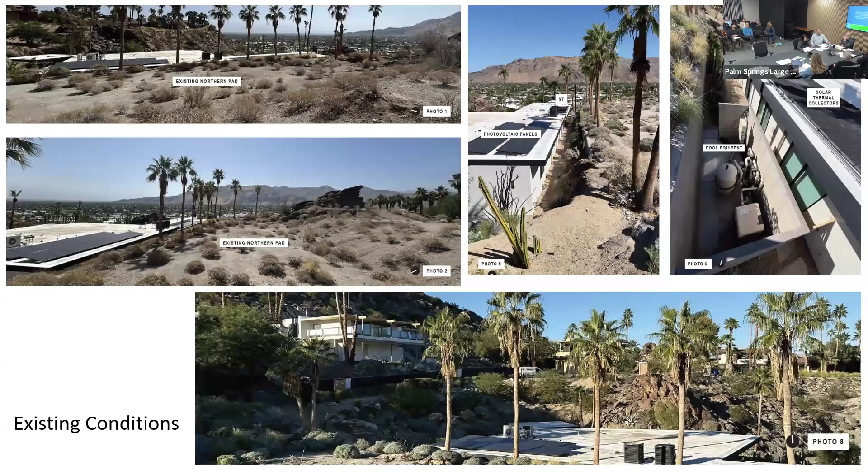As far as existing conditions go, the photos on the top left show the project site in relation to the house on the north and how it sits. I believe it's 8 feet lower.

As far as the initially proposed residence, that house sits at 19 feet 4 inches with the approval of an AMM application, and the stepped house sits at 18 feet at the highest point.

Overall, the sun studies show that there is roughly an equivalent impact on the neighboring house during the winter solstice time, whether the house is stepped or built as proposed. So basically what the sun studies have shown is that there isn't a significant difference either way.

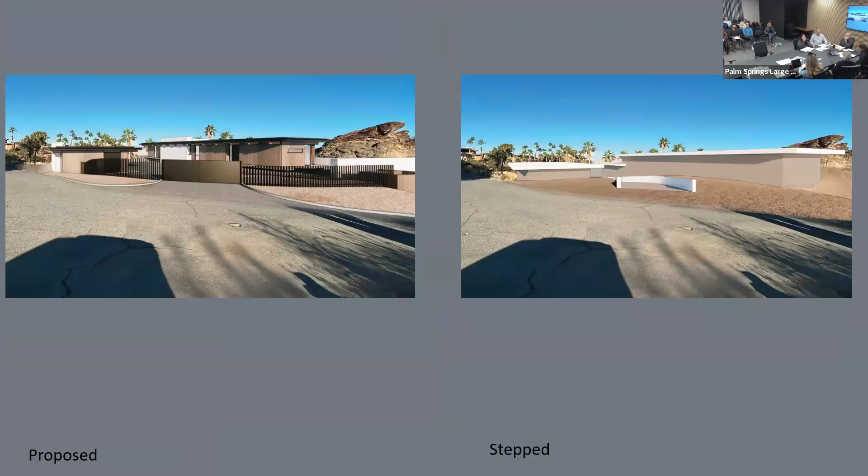Thank you. And just for reference, this is the street view with the proposed single-family residence, and this is the residence as stepped, so a continuation of the massing diagram.

The recommendation is that, based on the findings in the staff report, staff recommends the Architecture Review Committee approve the application subject to the attached conditions of approval. That concludes my report, and the applicant is available to answer any questions.

Questions of staff? I do, please. Just to clarify, are there two proposals, one stepped and one the original proposal? So there's only one proposal, it's the initial proposal. The applicant was just responding to ARC's previous comments to show what the potential could be if it was stepped.

Any other? Yep, so are we approving one or the other, or are we approving both? Just initially the first one, the one on the left, the one that's being recommended or proposed by the applicant. Correct, is the one that you saw on the left. The massing study, which is the one on the right, was the one that was requested by the ARC at its last meeting.

Got it. I have a couple questions, Alex, that I think might clarify that for us. As I look at the applicant's justification letter, the section on page 9, that remains the same, correct? The sections as they were presented last time. Yes, I believe nothing's changed. Okay, and there still is the request for a 10-foot setback at the front. Correct. All right, so all these things it came in with requesting before are still the same? Yes, with no change to the building massing? Correct. Okay, thank you.

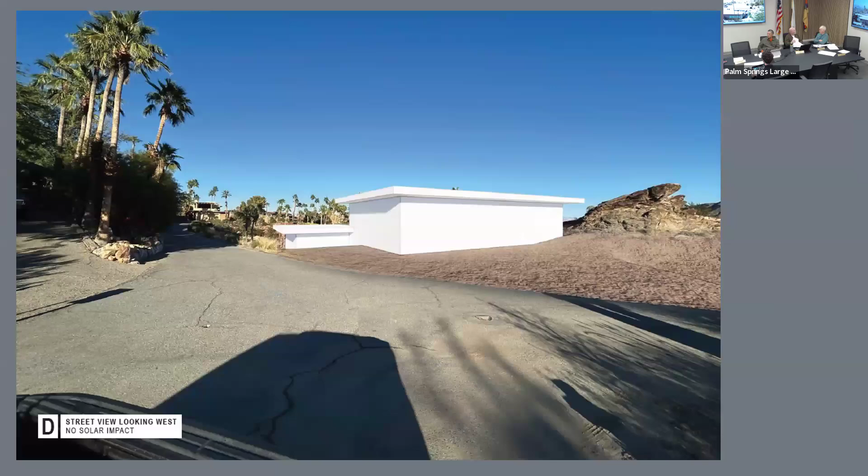So the window actually is through the end of a corridor which runs through the whole axis of the house. It's not into a water closet or a shower, it's just into a space that's the vestibule into the bathroom, so it's not necessarily as big a privacy issue as it might seem. I should have clarified that, but this might be easier to see—there's a main axis that's the central corridor of circulation in the house, and at either end we have a window.

In the case of the primary bathroom, we have a water closet on one side, and the vanity and showering facilities on the other. So you're not actually looking into the bathroom per se, you're more looking at the end of the hallway.

Okay, got it. Hannah and Charles, can you see that? Yeah, see it there too. I have a quick question.

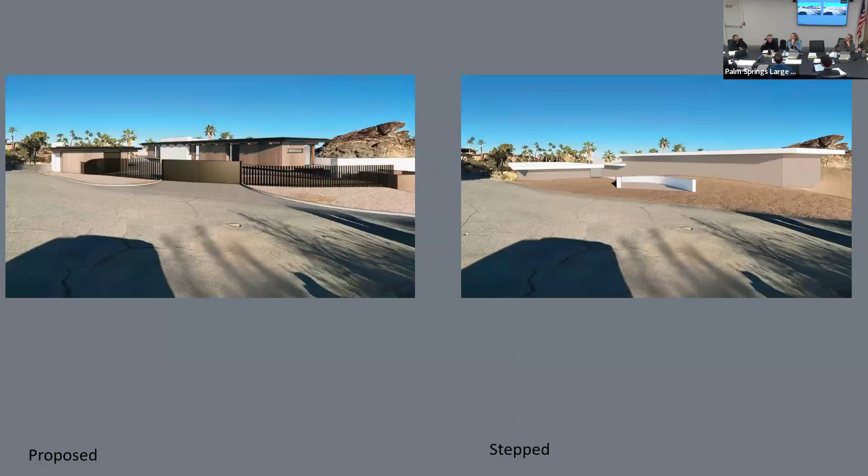It looks like there's a row of existing palm trees on the north side of the property. Are those to remain? They kind of appear and disappear in various images, hard to render when trying to pop them in. The intention is that they most likely will not remain based on the foundation work we'll be doing in that area.

They're not native, and we do have to add another wall behind the existing retaining wall that builds part of our planter bed, so those are probably coming out.

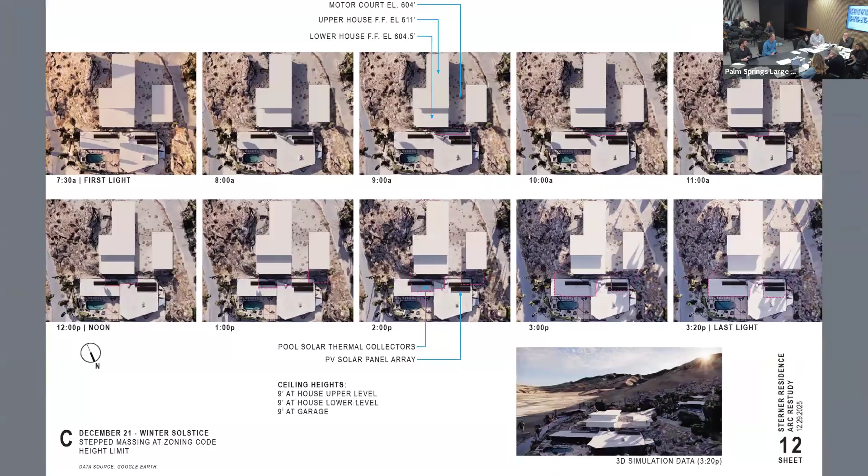If I may clarify too, we didn't necessarily touch on this in depth, but if we could go back to a floor plan. We discussed this in the last hearing, but we're proposing a planter box in front of this retaining wall that we're using to elevate the motor court. The original intention was to break up the height of this retaining wall with planting to soften it. We are not proposing a change in floor elevations in this round; rather we're proposing to further plant mature species in front of this wall to soften it.

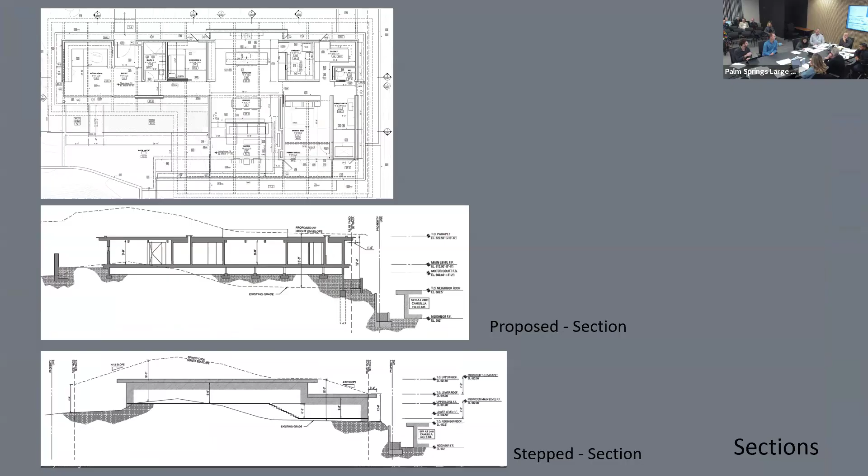If you could go back to the cul-de-sac rendering - I saw you had 15-gallon creosote in there, is that what you were showing? That was the original proposal. We haven't updated the landscape plan based on this new rendering, but the intent is to plant more mature and more upland species.

To essentially create the feeling that it's part of the slope, as much as we can, with native plants, bringing back a lot of the native vegetation that's been removed with the manufactured site that's there now.

Then there's the slope away from the street towards the garage that doesn't appear to have any planting plan. Right, it's very rocky right now - a lot of exposed bedrock and other looser granite, with a few small plants. We intended to keep it fairly native until it blends into some ground cover that wraps around the south side of the garage. We could certainly plant there, there'd be no harm in planting there.

I couldn't really tell exactly what was there, if there were rocks or what. It's hard to tell in these because it's shaded by the garage, but to the right of the garage there's a very dark area with a lot of bedrock. Yeah, and you have a condenser down there too.

Anna, did you have anything? I was just going to say the rock you see in that view was sort of the star of the show. So keeping that as the theme - I love that, I think that's great. We've tried to keep it open so that as you drive around the site, there's still see-through between the structures to see that rock from all the views, including from Leanne's house above. She's the one who looks down on the site the most, so we're really trying to keep the view open as much as possible, because the neighborhood has enjoyed seeing that rock for years.

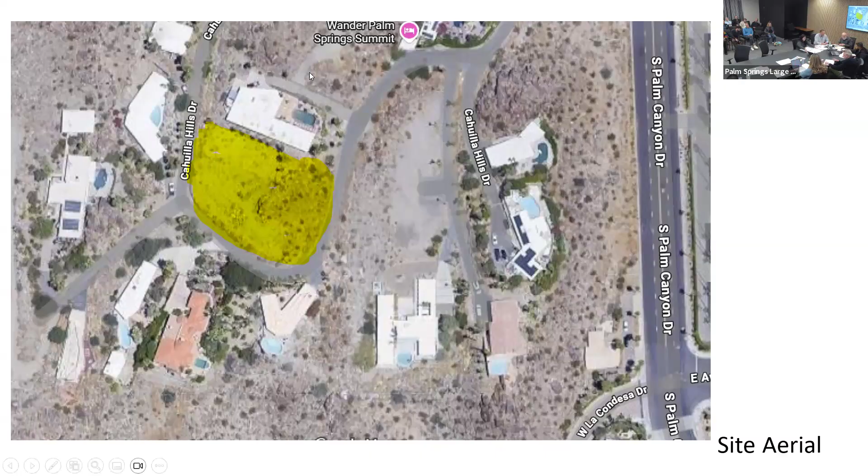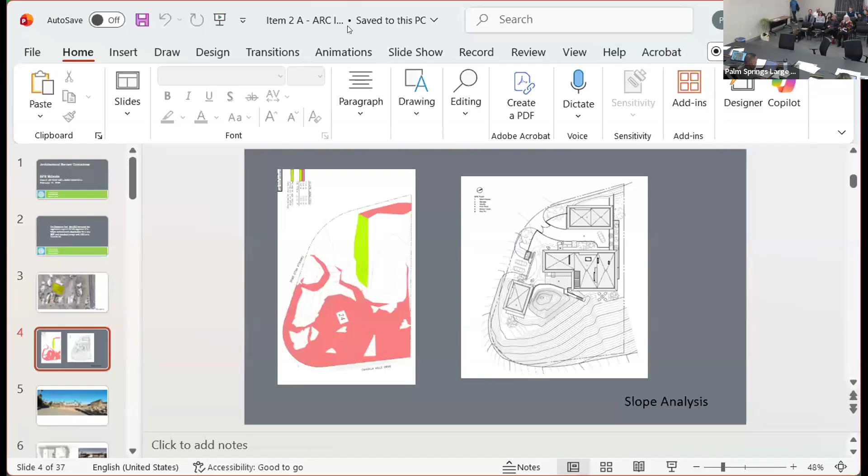Does somebody want to bring the chair back?

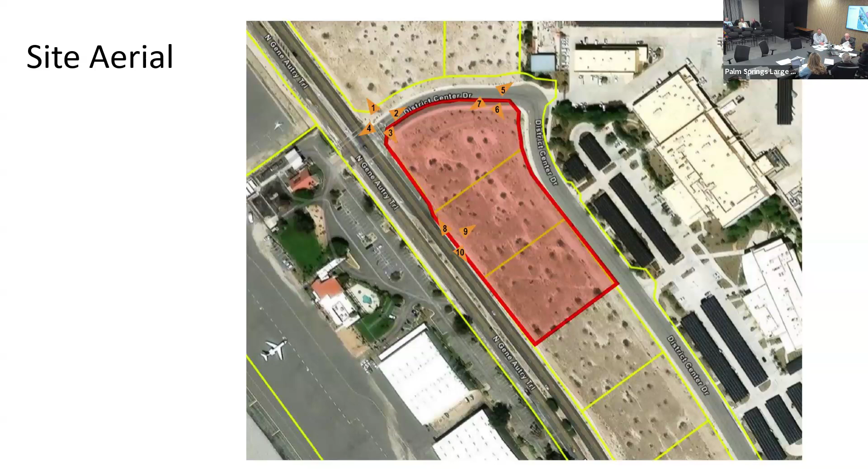So looking at the site, this is the aerial showing Gene Autry Trail and District Center Drive. The Palm Springs School District administrative buildings are on the right, and the airport is across the street on the left. So the tract map that was approved by the Planning Commission combined these 3 lots into 2 lots.

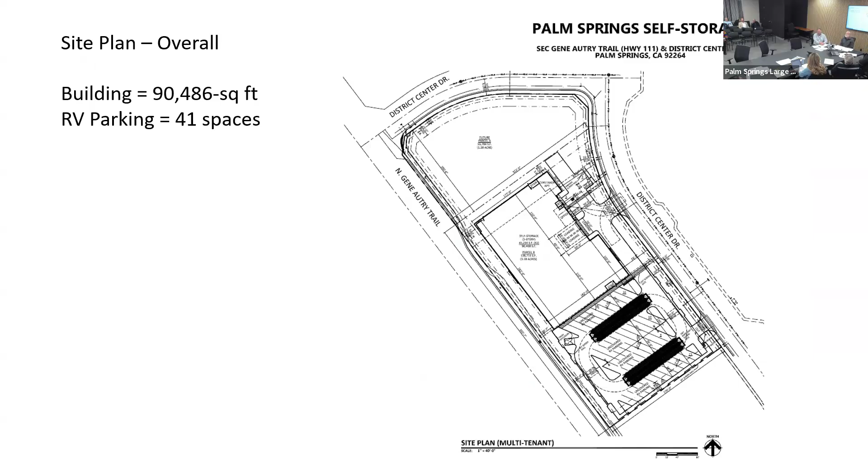The site plan, the overall site plan hasn't changed from when the ARC previously viewed the project. So the building is in the middle and the RV parking is on the south end. However, the building design has changed. This is a slide that the applicant has prepared that I included in here.

You'll probably see this again. So at the very top is what the ARC saw back in October. And then we at staff had meetings with the applicant to come up with a design, and also our Chair O'Donnell had discussions with them to come up with a design. So the second from the bottom was an iteration, and then the bottom slide is the final that's before you today. As you can see, it's evolved.

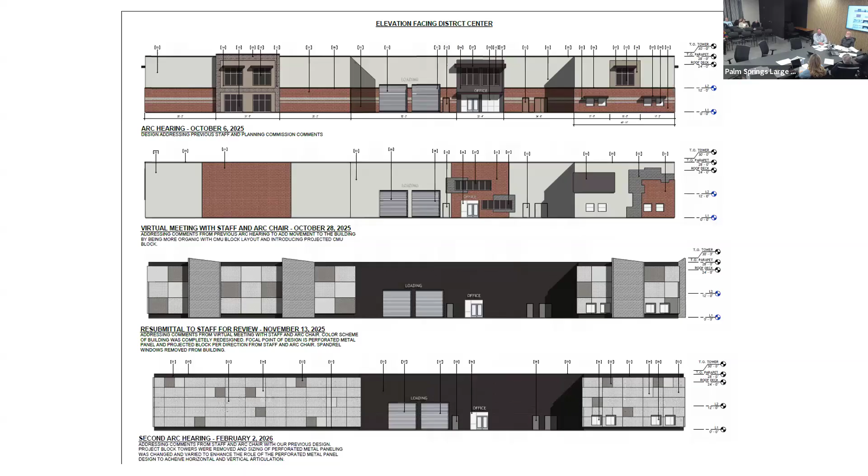This is the side that faces the Palm Springs School District building. This shows the loading dock areas as when you move your trucks in, you'll go into the building itself, the door will close. The applicant has provided renderings showing what this is. Basically, and the applicant will describe the building in more detail than I can, but it is a CMU building with a skin that's metal rectangles and triangles with perforated openings to provide light and visual movement as you go up and down Gene Autry.

One item here is on the corners, the southwest and northwest corner are clear glass that will see into the building itself. So that is a feature that the applicant wanted to maintain. And this is a rendering of the side facing the school district building.

One of the elements of the building is a night illumination. The ARC asked them how would this look at night. They're adding LED light bars that are at the top and bottom of the structure so that the light illuminates the building itself, and then the screens that are set 8 inches off.

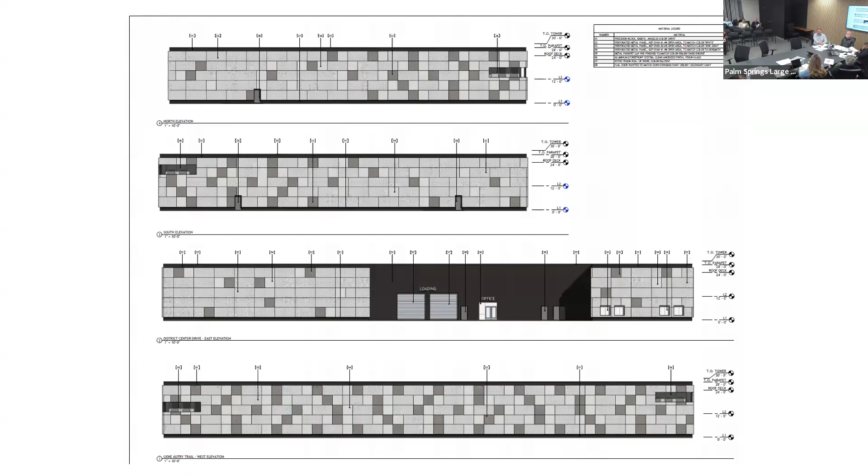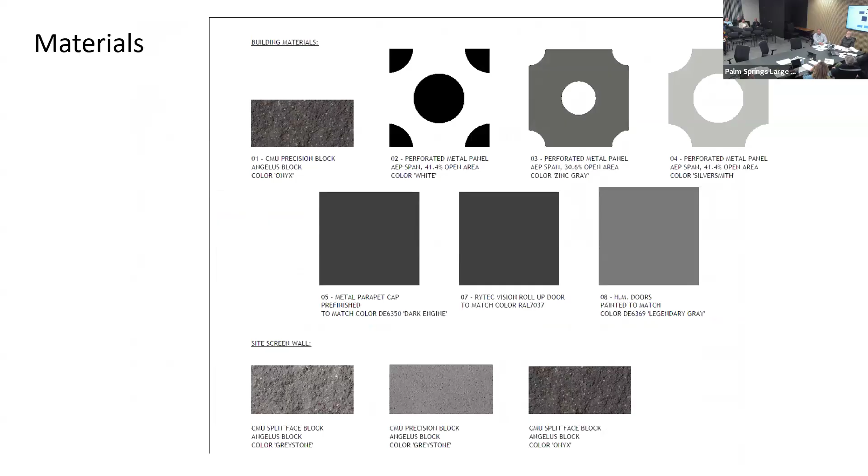And this is another rendering showing how it will look with the step backs so that it provides interest and motion along Gene Autry and the landscaping.

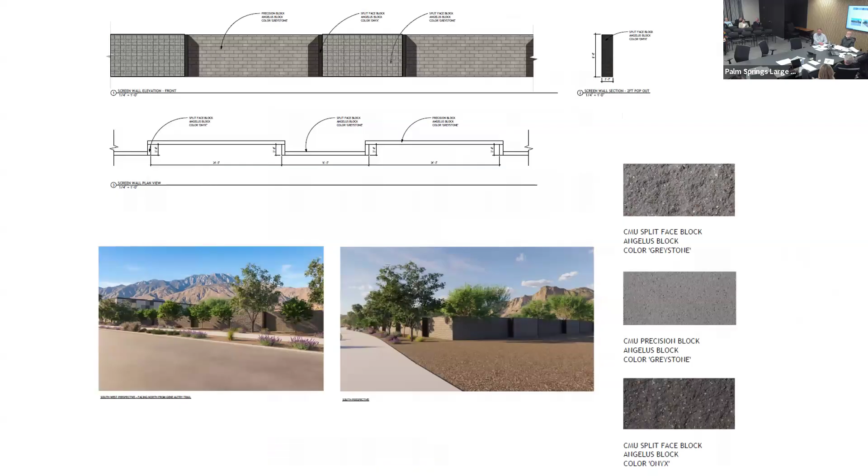However, the clear glass windows at the corners, the alignments don't quite seem right, and the ARC may want to discuss as a recommendation to the applicant. This is the third review of this project. You have a couple options: you can approve it with conditions, or you can deny it, or you could restudy it. They have one more return if need be to the ARC. And that concludes my report.

Thank you, Mr. Malacca. Questions of staff?

The CMU wall, is that located on the side? It's not in front of the building, right? It's in front of the RV park? It's the RV, so at the bottom. Yeah, so that's what I thought. It goes there. And then is it on District Center Drive as well? No, it ends here. Got it. Okay, so it's just wall here, blocking. Yeah, there's a gate here.

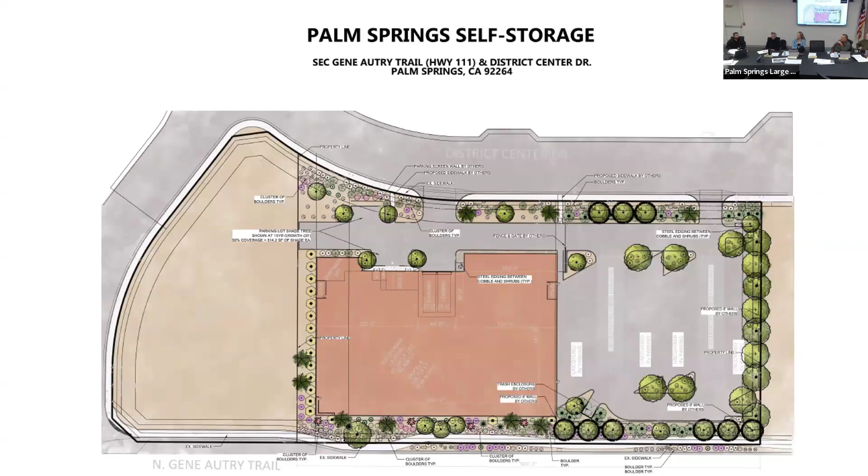Any additional questions of staff? Maybe I can ask the applicant this: is the wall illuminated as well? Is there landscape lighting that'll illuminate it? I don't think there is. No, they're shaking their head no. They have a presentation too, and they'll address that.

Any more questions of staff? I've got one. Was there any physical material samples submitted? No, I don't have a physical sample. We have some today that will. You have some today? They brought them with them. Nice, there you go. How about perforated metal? Oh, all right, good deal.

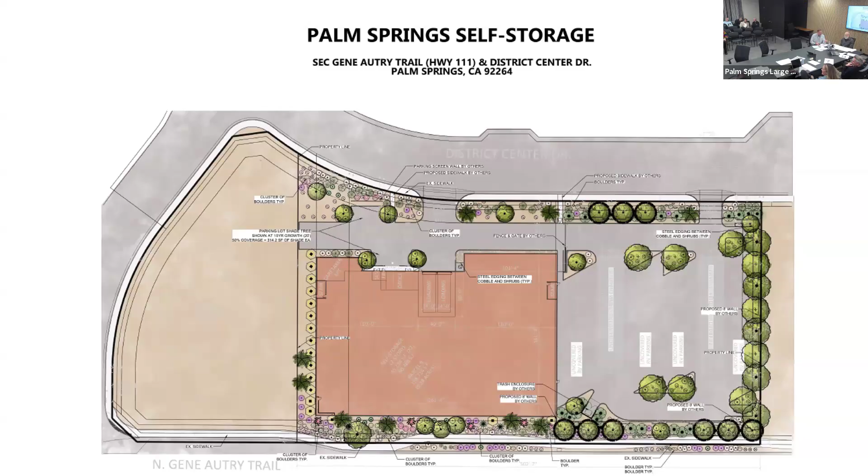Show and tell. All right, well, if there's no other questions, then we'll invite the applicant to come up and make a presentation. With samples, yes.

And is that a tree? No, that tree's on the other plan. We've never had a tree. Haven't had one yet, that's a shrub. Oh, a shrub, sorry. It's always a first. Yes, be careful what you wish for. Point is, it was hectic enough time flying into here today. Well, good to know.

State your names, introduce yourself, and then dive in.

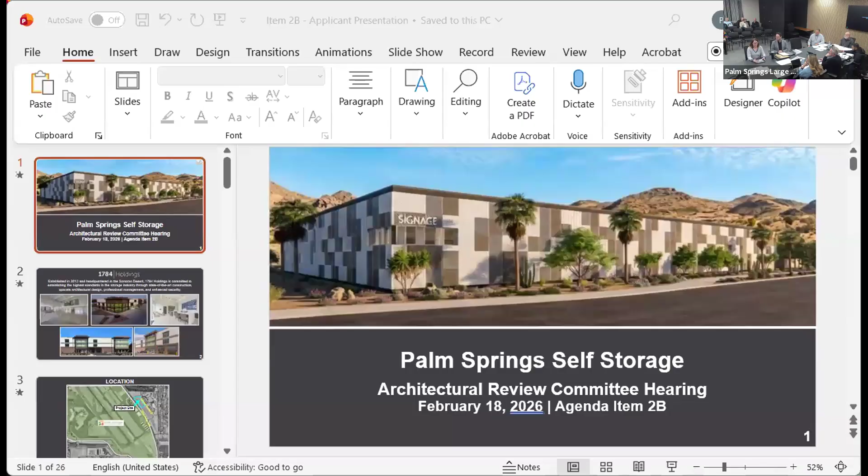Michelle Bach with 1784 Holdings, here as the applicant. Hi, my name is Shane Swerdlow, I'm a land use consultant at Craig Lawson and Company. Excited to be working alongside Michelle Bach, and we also have Alex Matchner from our team here. They're both from the design and development team at the applicant, 1784 Holdings.

But we appreciate this opportunity to come back to you and share our design updates, which have really evolved significantly. We appreciate the thoughtful feedback you provided at our initial hearing and the subsequent discussions we've had with Chair O'Donnell and with staff. I think it really advanced this design in an exciting direction, a very unique take on an industrial or self-storage building. We'll walk you through the different updates that we've made.

As a recap, 1784 Holdings was established in the Sonoran Desert in 2012 and has grown to be one of the leading developers and managers of storage facilities in the U.S., with an increased focus on Southern California and the Coachella Valley, and a commitment to high-quality design.

The slide shows photos of 1784's other facilities, which served as inspiration for the original design that we presented to you. It's a design that's received high praise in many different jurisdictions, but we've heard loud and clear your interest in thinking differently about the self-storage design, not necessarily looking at office buildings as our design inspiration, which is typically what the inspiration is for these projects, and thinking about the unique context that we have here in Palm Springs in terms of the built and natural environment.

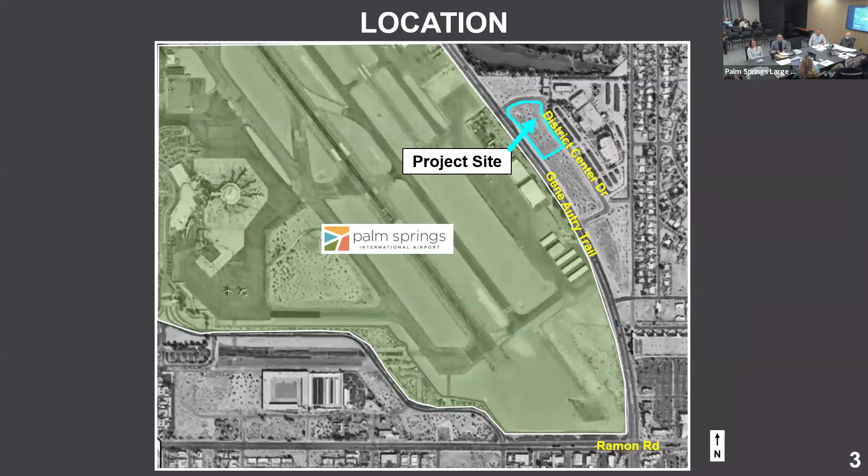As you all know, the site fronts on Gene Autry Trail and District Center Drive, and we're right across the street from the backside of the Palm Springs International Airport. In the immediate vicinity is an industrially zoned district, really envisioned as an industrial park. It's mostly undeveloped at this point, but the immediately surrounding properties on either side of us include the Palm Springs Unified School District offices to the east, and then the Palm Springs International Airport to the west.

The school district buildings do have that kind of industrial office park aesthetic, but one of the dominant visual features from the street are the solar canopies over the parking spaces, which are predominantly metal. When you look at the airport property across the street, most of the buildings along Gene Autry Trail are pretty utilitarian in character, but metal is also a very dominant visual feature, whether it's the shed-like structures or other buildings. So metal is important in this area, and that was something we took into account with this design.

Our site plan remains the same as what was previously presented. It's really the architecture and aesthetics that have evolved. But as a recap, it's a 2-story climate-controlled self-storage building on the north portion of the site with RV storage to the south. There are 2 internal loading bays, a customer service office, and a caretaker unit, all located on the District Center Drive side of the property next to the customer parking area. And then there's the 8-foot screen wall with landscape buffers that would surround the outdoor storage area where the RVs would be stored.

At our previous hearing, the ARC feedback focused on several key themes, including authentically conveying the building's use as a storage facility instead of attempting to appear as an office building, and revising the design to be unique to Palm Springs' distinct built and natural environment instead of a design that has been featured at other locations across the country. We were encouraged to consider ways in which the design of the project could convey and respond to the spirit of motion that exists along Gene Autry Trail, where people are driving by, and also shaped by the ongoing motion associated with aviation uses at Palm Springs International Airport.

We received very strong interest at the hearing and in subsequent conversations about having nighttime illumination integrated into this project, and we're excited to have incorporated that feature.

Our updated design embraces the pure form of the building's storage use without the office building features. For example, there are no longer spandrel glass panels, which some call fake windows. Those have been removed. Stucco cladding and brick veneer have also been removed. So we're revealing that underlying concrete masonry unit and embracing its beauty as a building material. All of the concrete blocks feature a dark onyx color, which is actually right here. We'll pass this around a little bit later when we talk about the building materials.

Projecting approximately 8 inches from the building facades is a perforated metal screen, which adds a sculptural element that reinforces the spirit of motion along Gene Autry Trail and derives inspiration from metal, which is that dominant visual material in much of the surrounding built environment, as well as a signature material of aviation and aircraft, which are a big part of this particular location. We feel this 8-inch dimension for the offset provides sufficient space for the proposed light fixtures that would go behind the perforated metal screen and allows for long-term maintenance of those features.

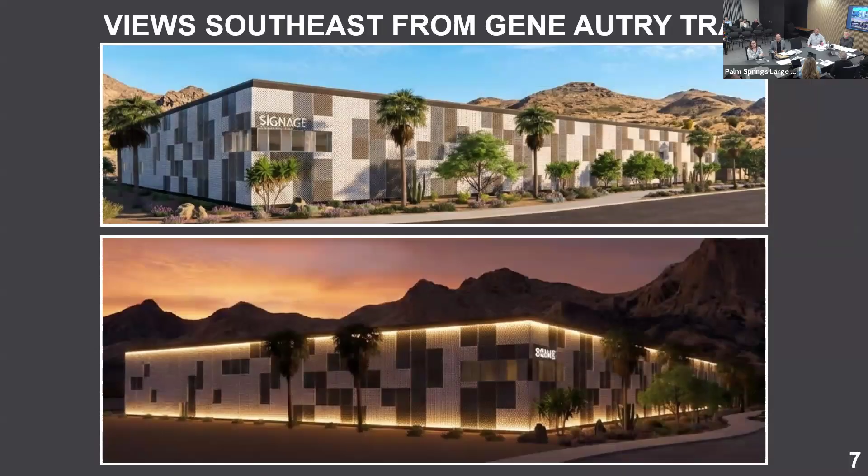So these are renderings that show the Gene Autry Trail elevations at day above and at night with the illumination below. And these also preview the enhanced landscape palette. There wasn't a lot of feedback about landscape at our last hearing, but as we developed the architecture, we wanted to bring in some more sculptural landscaping and some more color to complement the neutral colors of the building.

So getting to our materials, we did bring material samples with us. Michelle has a sample of the onyx block, and then we have the different colors of panels that would be featured. There are 3 different colors: gray, white, and silver. The gray would be on a panel with approximately 30% open area, and the white and silver would be on a panel with approximately 41% open area. So there would be a mix of panel patterns and colors.

And we did a lot of exploration of what shades to use, whether to integrate color. We looked at... Stop for a second. Oh, sorry. These are aluminum sheets, but the panels are in steel. So these are I saw you waving it around. These are the color? These are the colors. They only sent us the perforated sheets in aluminum, both the color and the material.

Sorry, go ahead. No, thank you for that commentary. So talking about the screen wall, the design has been simplified and updated to complement the revised building design. The screen wall includes projecting bays that each extend 16 feet and then inset bays that each extend 24 feet, with a 2-foot perpendicular panel that connects the projecting and inset bays.

It's the same gray stone? Yeah.

And the color Greystone that our team selected most closely matches the dark gray metal panel. So it's slightly lighter than the onyx block that's on the building, but we are proposing onyx at the 2-foot perpendicular segments just to have some accentuation.

We're just going to refer to it as your sport coat. Inspired by the gray and black today. And I actually like the black accent wall in here too, and the stable is really nice.

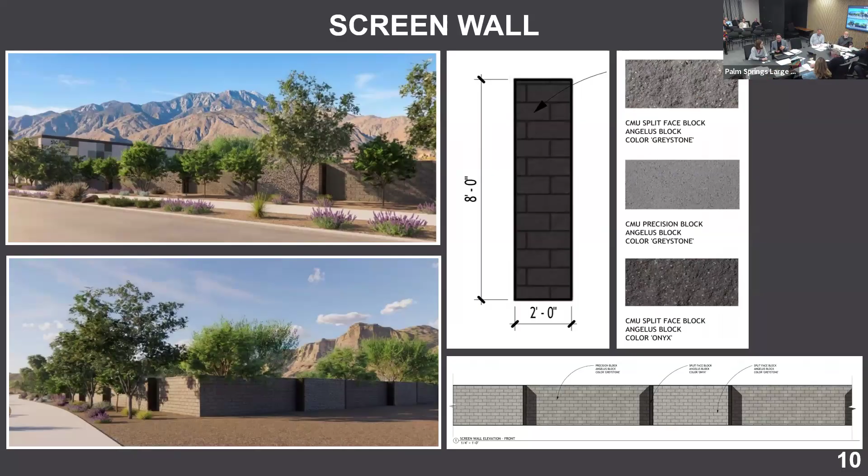So yeah, it's a much simpler design of the wall. In our last iteration, we decorated the building a lot, we decorated the wall a lot. So this is seeking some more purity in form and expression.

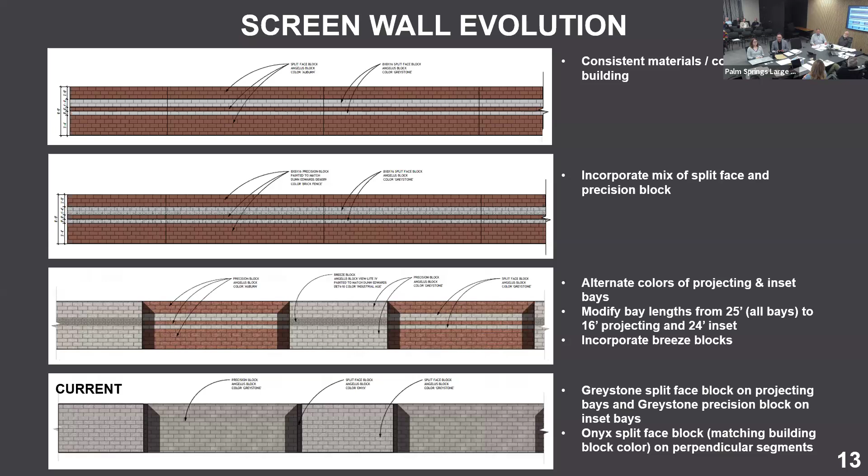And then Glenn walked through the screen wall evolution. So we've really abandoned the mix of different colors and the Auburn. We previously had some breeze block that was mixed in, and we've really gone to just a more pure form that complements and doesn't compete with the building design.

So our landscape plan, as I mentioned, has evolved. We still have an array of shade trees proposed throughout the site, mostly concentrated around the outdoor storage area. And we had added at our last hearing shade trees within the outdoor storage area to provide shade, reduce the heat island effect, and provide additional buffering. The shade trees we're proposing include desert ironwood, blue palo verde, fruitless olive, and thornless Colorado mesquite trees.

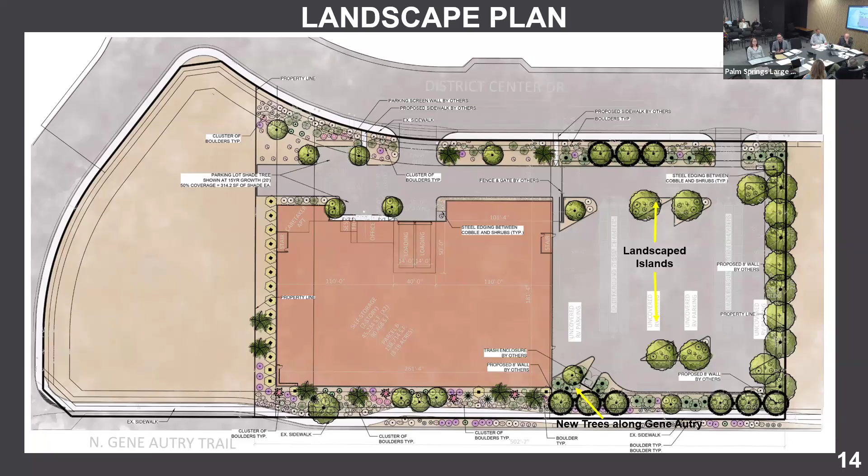And we've integrated some more sculptural desert plants into the mix. Because the building is so neutral, we wanted to bring in more color with the different shrubs, but also with the really contemporary design, wanted to bring in some plants that complement that spirit. So tree aloe had been added, as well as organ pipe cacti, and we continue to have California fan palms integrated, which we feel are such an iconic part of this corridor in Palm Springs.

So that concludes our presentation. Again, thank you for the thoughtful feedback you've shared with us, and we're happy to answer any questions.

Thank you so much. Mr. Lyon, before we take public comments, should the committee ask questions of the applicant? Did you have any other questions for staff first? Any questions for staff? No. We have questions for the applicant. There you go. Okay. Who would like to start questions for the applicant?

I will. All right, Vice Chair. Well, suffice to say, I'm intrigued. I can speak for myself. This is interesting. And, okay—

Is the intent that the building does not show at all from behind the screen? Well, the intent is to have that interplay of block and metal. So metal is the dominant thing that you see, but when the metal is up, you do see through it. You do get the sense of block behind it.

So I will see a monochromatic mass behind it. And there basically will be no need for articulation of windows other than what you're showing on the ends. Is that correct? That's correct. We're not proposing any additional windows. Okay, so it's this monolithic thing that I just have a sense of that goes on behind there.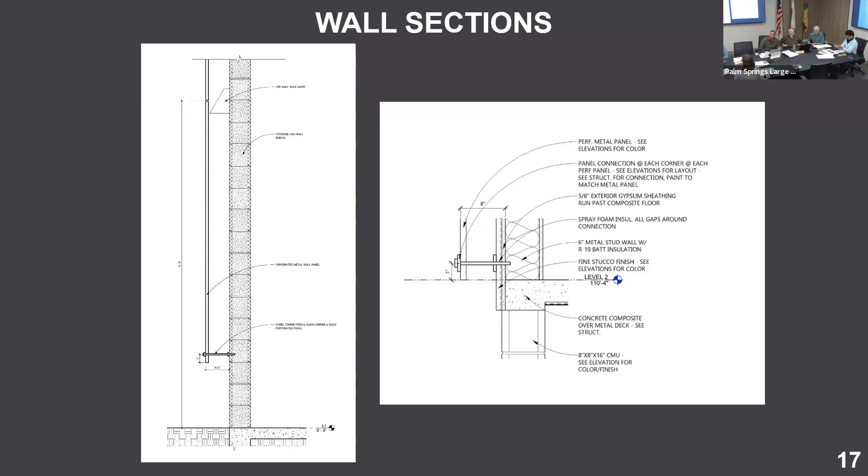These light bars - where do they sit in relationship to the front face of the screen? They run on the top and bottom of the panel. The building itself is 30 feet tall, and the panels span about 26 feet of that. So just under the top and just above the bottom of the screen is this LED track with this light. Is it made for this specifically? It's made for outdoor uses, to withstand the weather and outdoor conditions. We've consulted our lighting company with this, and this is the light they suggest that would adhere best to the panels and illuminate it. That's a cut sheet of the light fixture.

The reason why I ask is when we look at your renderings of it at night, that's very glamorous, and it takes great finesse to deliver precisely what we're looking at here. So you have a lighting designer involved in this? Yes, they've provided all of our lighting that is proposed in our package.

To the issue of the panels - will they actually be steel, not the aluminum we're seeing here, and are they powder coated with some sort of guarantee forever? You know where this is going - because a manufactured failure of one of these parts in this very interesting approach would not be good.

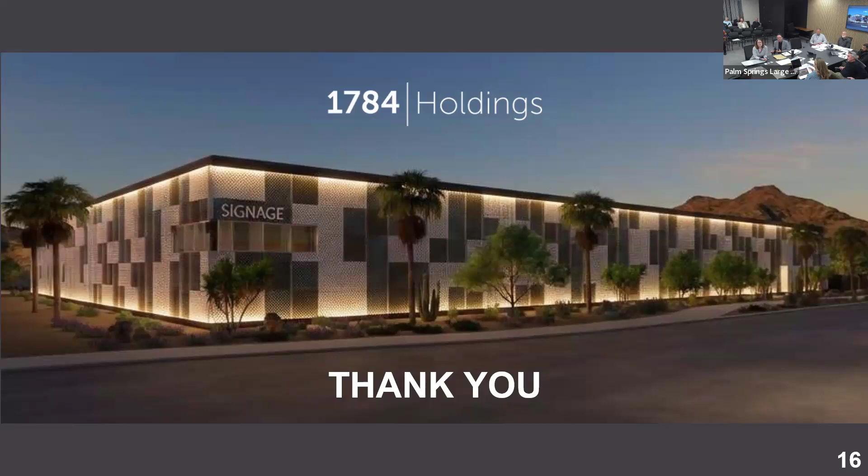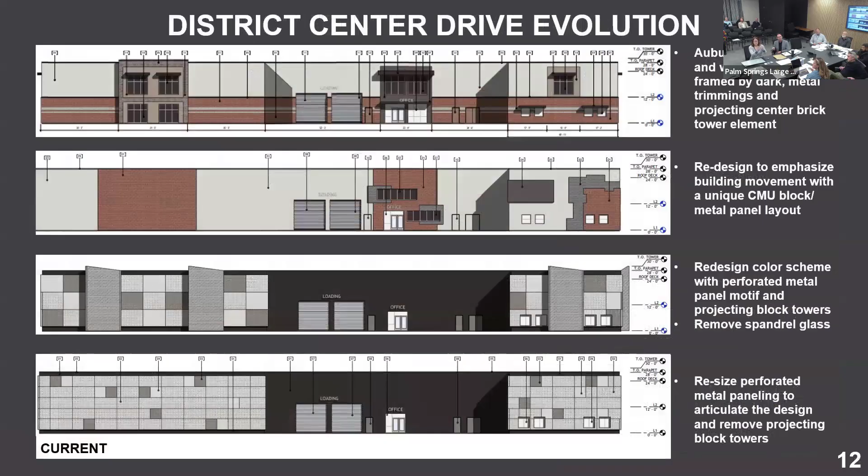I'd also like to point out, can you pull up the District Center Drive side? There is a spot in the center where there's no panels. There's a good rendering - it's the daytime and the nighttime one. That's here, the back. I understand District Center Drive has activity, the school district and all that, but for all intents and purposes, it's more the non-public facing side of our project. So there is the inset portion where the panels, as they wrap around our building, kind of die into that furthest inset section.

That is all pure, open. That's where all our entrance activity is happening on that wall - it's the two loading bays, it's the office, and as you wrap the corner, that's where the manager goes into their caretaker unit. So it's kind of all that hub activity, that more simplistic wall.

When you bring up this other building you've done in Arizona, I think that's a critical piece for us to see at some point. We actually have three properties that have that screen on them. I've been a part of three projects. 1784 Holdings owns one of those projects. They're all located in Scottsdale, Arizona. I'm happy to send all the projects over. One of them is on our website since it's a 1784 owned property. The other two are just ones I've worked on in my past career.

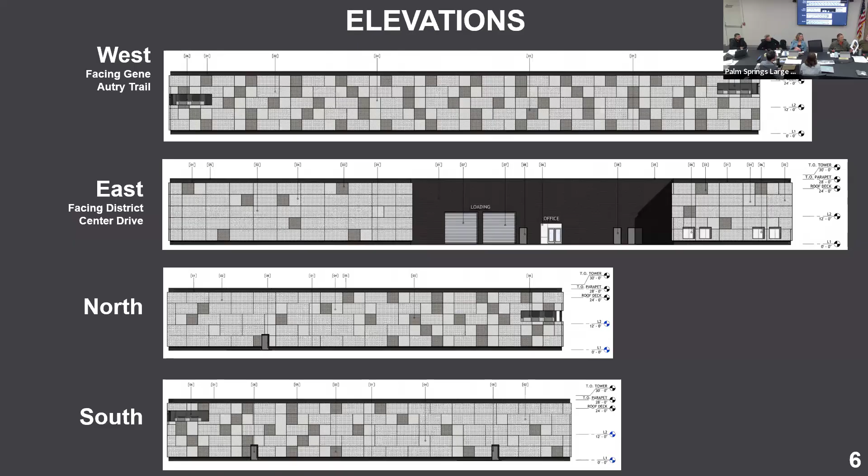Maybe, would you like, as opposed to the light covering the whole back, or potentially the light projecting onto the building instead of being backlit from behind it? I'm not a lighting designer, but I almost feel as if the light needs to have a dual effect, casting light on both the front and the back. Let me suggest, Member Castro, that we put this in discussion, because I've got some experience with this.

And then the perforations, you had on the slides these different perforations. Can you clarify how they're being used? Essentially we have these 2 patterns, one has approximately 30% openness, the other has 41%. This particular panel will always be the white and silver, and this panel will always be the darker gray. So when you see darker gray on the elevation, that's using this right perforation sample, and anything white or silver will be using this left panel. They are the same hole sizes, but the density is different, so there's more of the solid piece in the 30% versus the 40%, but the physical hole diameter size is the same. And these are the two most open steel panels.

My other question was, why no lighting there? It feels like it's missing. There actually is wall pack lighting on the building, it's just not being depicted in those nighttime renders, but there will be lights from the office and the loading area. As Shane mentioned, we have a photograph of our other properties where the loading roll-up doors are glass, so you can see they are illuminated. Even here, you can see everything that's under the loading sign.

Those are glass doors in the office, so there will be some interior lighting that is illuminated. Plus there will be wall pack lighting on that portion of the building, and pedestrian lighting around the building. In that middle image, the office and the loading bay doors are kind of glowing back there, and then there's wall pack lighting in between them.

Is there any special framing detail at the windows? Is it basically like the frame and the panel continue and then there's just none? Yeah, it gets cut out and there'll be an extra horizontal frame that wraps where the window opening is. So you obviously won't see the frame between the panel and the window, it'll be fully open in that area.

Okay, well, thank you for the presentation. Are there any folks in the audience wishing to speak on this project?

We have nobody here in the audience. Is there anybody in the Zoom room that would like to speak on this item? Please raise your hand. There are none. Seeing none, thank you, guys. We're going to go into discussion, so please have a seat.

Thank you. All right, member discussion. Let me start, since I didn't have any questions because I've kind of been involved with this project for a while. I really appreciate the way they've gone about this. It's taken a while to get here. My sense is that the committee has a few comments and questions and maybe things we can suggest for improving, but it looks like we're going in the right direction here.

The process has been kind of long, getting to the point where we've got a building with a skin, and the skin is creating a pixelation and some variety on the facade. I think it's an interesting one. They've been encouraged to look at three-dimensional expression on that facade. It seems like maybe it's a bridge too far for them. I would have really liked to see these planes being folded and having more of an origami kind of texture moving across that building that would have changed as day turned to night, with different lighting throughout the day.

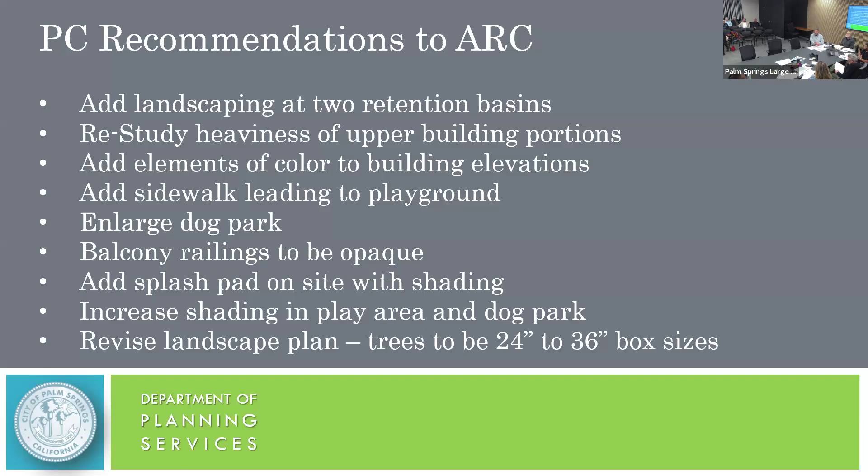The splash pad is one item that was not included in the project, and they'll be able to address that. They increased the shading in the dog park and play area, and they revised the landscape plan to include 24 and 36-inch box trees.

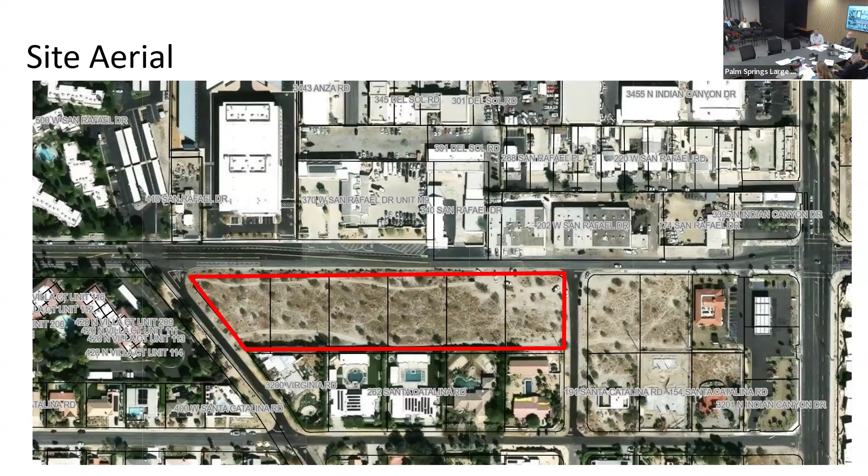So looking at the site, this is on San Rafael on the north end of town. Virginia Drive is on the west, or the left, and Puerto del Sol is on the right. It's a very narrow rectangular lot, and around it is other industrial type buildings to the north, and then a new mini storage lot or building on the left-hand side that is 3 stories.

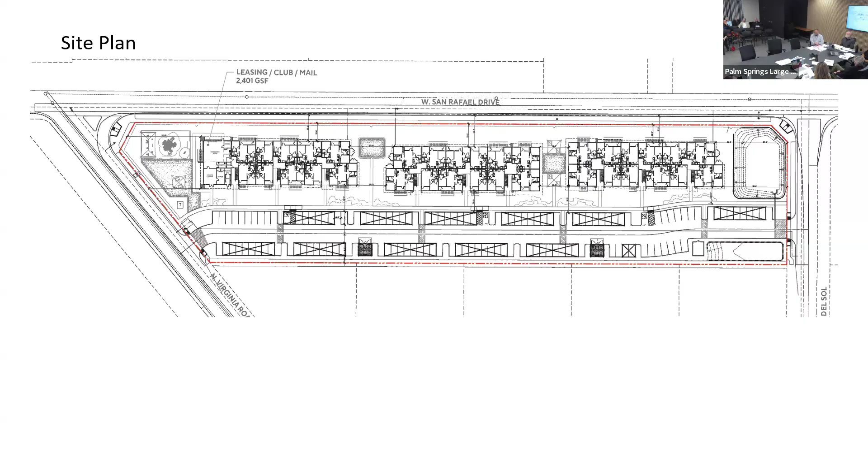The X's are carport shade structures, and the trash enclosures are the darker boxes on the bottom of the site plan. There are also two retention basins along Puerto del Sol, and we'll get better designs of that. So they are providing the 50% open space, which is a requirement in the R2 zone.

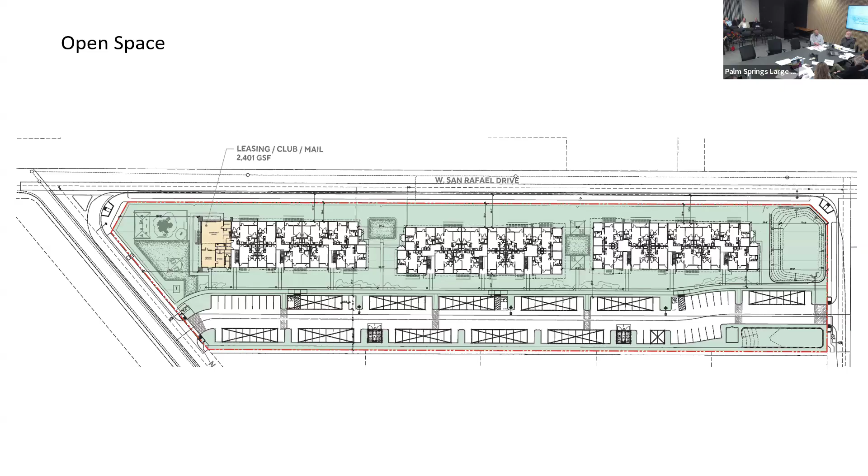This section of San Rafael is lacking in connectivity. The Tower Market farther down the street put in curbs, gutters, and sidewalks. This is another connection across the street where the new storage unit was built; they added curbs and sidewalks. The only missing piece is the industrial buildings across the street, and eventually that will redevelop and the street will be widened as much as it can be.

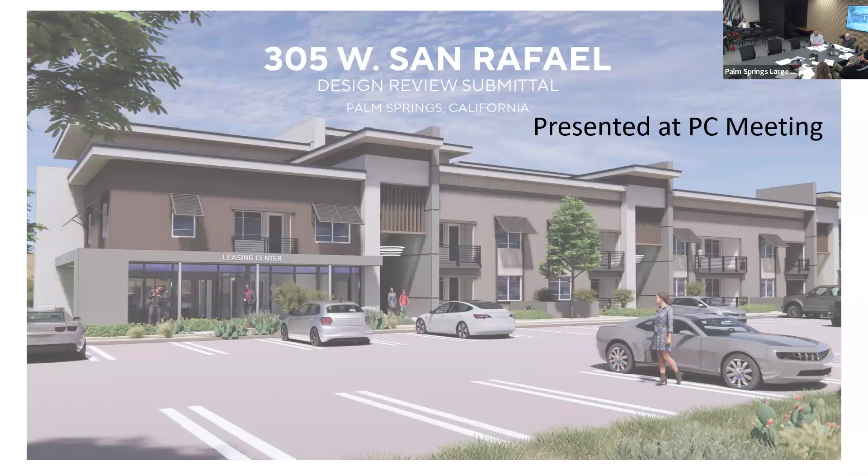Looking at building design, this is what was presented to the Planning Commission. This was the rear facing the parking lot. You'll see that the Planning Commission had some concerns about the height and the massing of the buildings, and the colors.

The project has evolved. It has gone through a couple revisions with staff and discussions with some ARC members, and this is what they're presenting today.

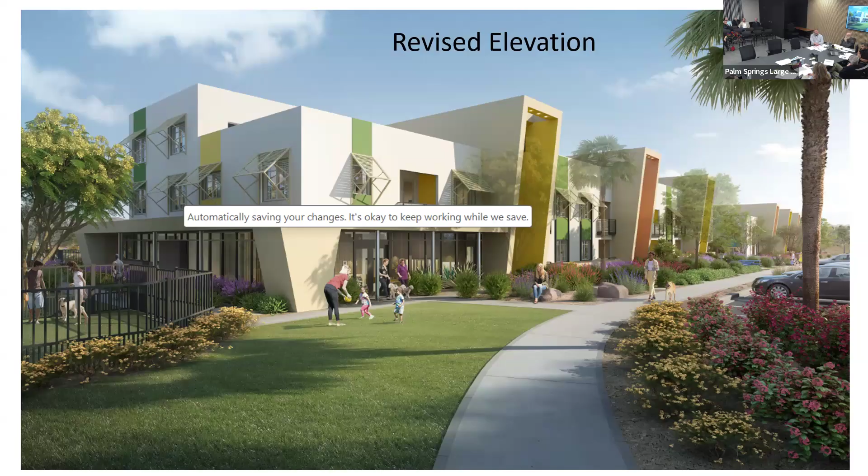A slide showing each of the three buildings facing San Rafael. Once again, this shows the fencing that will be along the street, types of landscaping, the different colors and elements, the shade structures or awnings over the windows.

One thing I would mention is that the buildings are not all the same - some are 2-story and some are 3-story. As you can see in this image, it shows 2 stories at the ends, and the 3rd story is in the middle of the building itself. So there's different variations of the heights on each of the buildings.

This is depicted in this elevation showing what's 2-story and what's 3. So only the units facing San Rafael are 3 stories. The back sides are lower, and we have an image showing the building height.

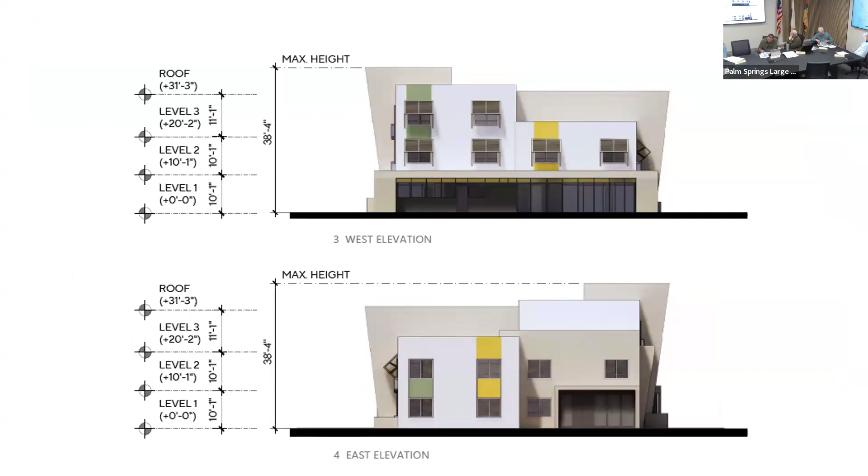The building height is 31 feet 3 inches. However, the tower elements are at 38 feet 4 inches. These are allowed as they are mechanical screening for the roof equipment on the upper roof.

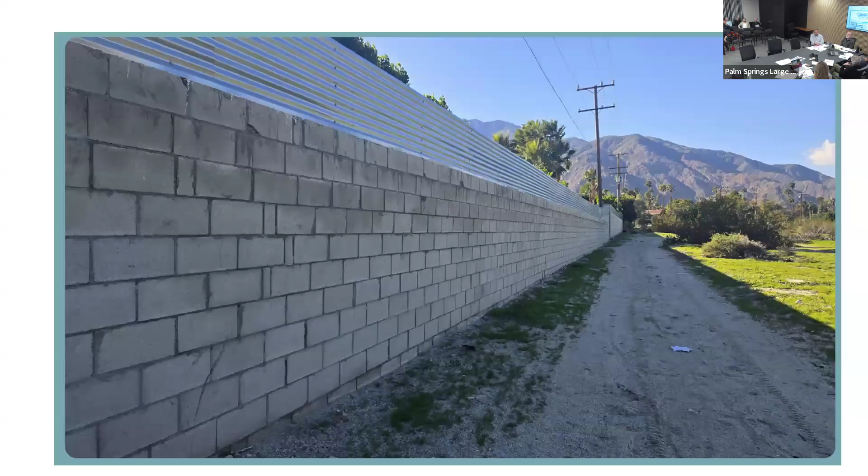The wall that is between this property and the residence to the south is an unpermitted overheight wall, at least 8 feet, with a corrugated metal piece put on top, and then ficus trees planted on the residence side.

I would like to note that there also is a power line that runs along the back of the house, and you can see it here.

There is a lot of discussion of the plantings between the south property line and the residence itself. The Planning Commission recommended, and the City Council discussed, the types of plants that would provide screening for the single-family houses to the south. I'm hoping that the ARC can come up with an idea as to what plant is appropriate.

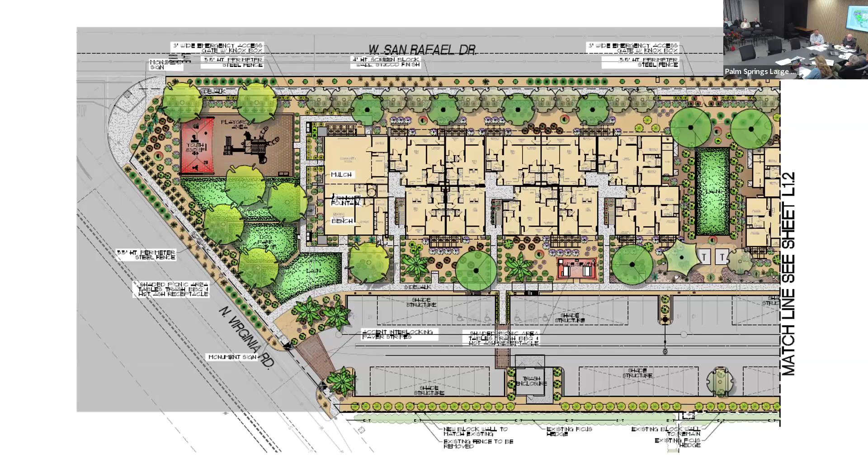Moving farther into the site, this shows the lawn areas and the landscaping along the street side with trees that will provide shade for the sidewalk itself. Then moving on to the retention basins, they have added landscaping in the basin itself to help soften it and provide some shading or interest.

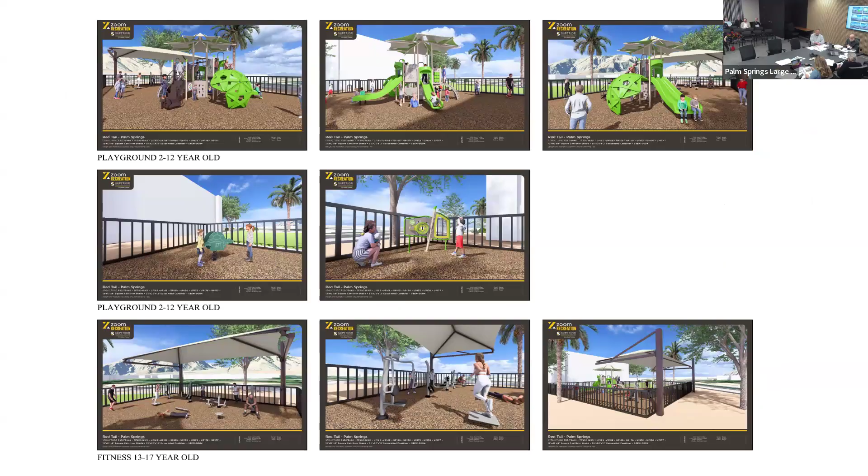The applicant has provided different types of playground equipment and shade structures that will be used. These are just for informational purposes. They also provided a cut of the elevation of the trash enclosure and the carports that are proposed, which are simple carports with a metal beam and a lid on top.

So concluding my report, we suggest that you approve subject to conditions. This is the third meeting of this project, so there are two more possible reviews. If your decision is to approve, you can approve with conditions, you can restudy it and they can come back for one more review, or you could deny it.

I want to make a quick point on that. We are looking for an action tonight, not a continuation. The applicant, because they are doing this with affordable funds, is looking for a decision from you tonight. So you can take any of those decisions, but we are not looking for this to be continued further.

Thank you for clarifying. Is the staff report concluded? Yes. Okay, thank you. Questions of staff?

Are the playground and dog park requirements for the development, or are those added attributes by the development team? There are amenities that are provided, and I guess they can discuss the affordable housing component of it, since certain things have to be provided in affordable housing. That's what I was getting at, I was wondering if they were required for that purpose.

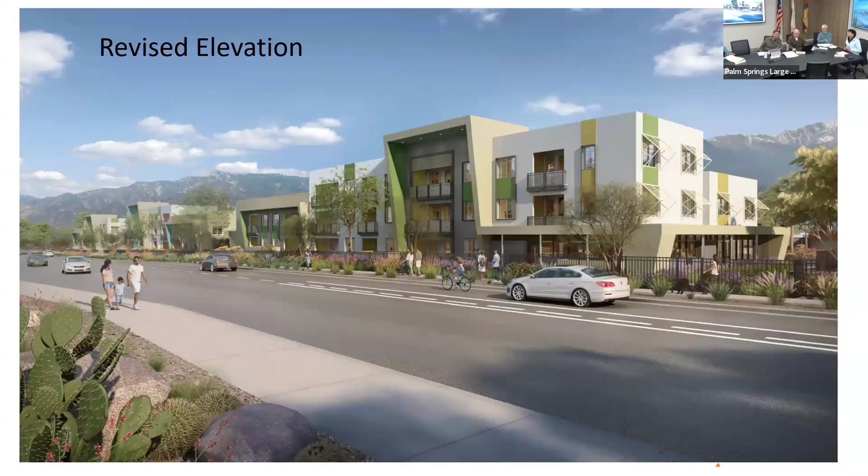Then also, you said the dog park was moved from a previous location? Yes, the dog park was in the center of one of these buildings, between two buildings, and they moved it to the west end, which enlarged it. Sorry, the slides are slow. Okay, so it used to be here, and it's now over here.

Go ahead. Glenn, about three-quarters of the way through, you made mention of something about high windows that were letting in light. It just went over my head, I didn't get it. Was that the old design, or is that reflective of the new design?

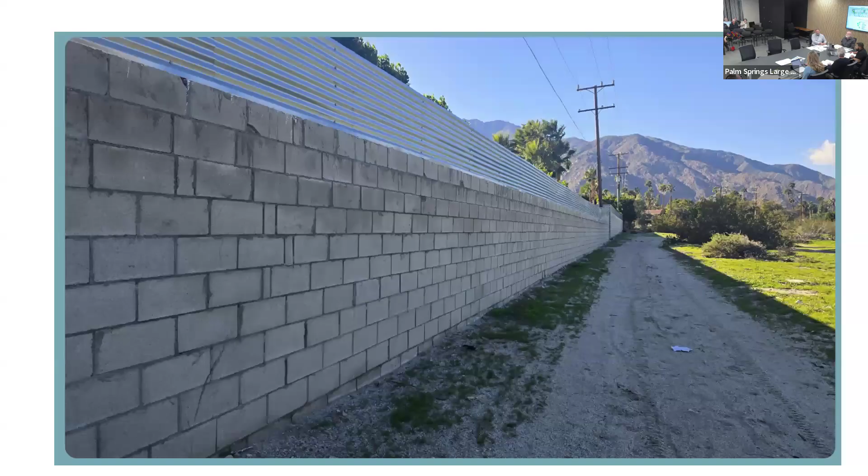It's right before that. There, what is that? There, right, so let me get to an elevation. So that's these windows here.

And you pointed them out because they have to be high windows or something? We pointed them out because if you read the comments from the neighbors, they are concerned about views out of these windows into the backyards of the neighboring properties. Okay, and is this a solution? The applicant is aware of it, and this is what they're proposing, because they'll explain.

And your sightline diagram reflects the condition of the building? Yes. Okay. Question, you had a cross-section or diagram that showed the distance, I think, from the building to the south property line? Yes. Get to it. Okay.

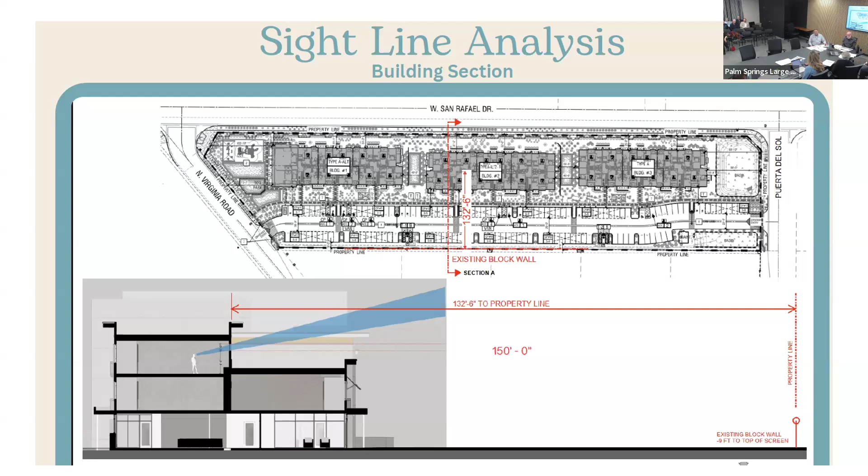132 feet, from the third level portion, right? And that's where that window you were talking about, right? So 132 feet from the south property line, okay? And that third level is where, there's a third level where the, I think not the elevator, but the stairway, is that right? Yes, it provides access, so consider this on top of the top one, so the stairwells are aligned, and then the third floor is laid on top of that one. So it's only the front row of apartments that are third floor.

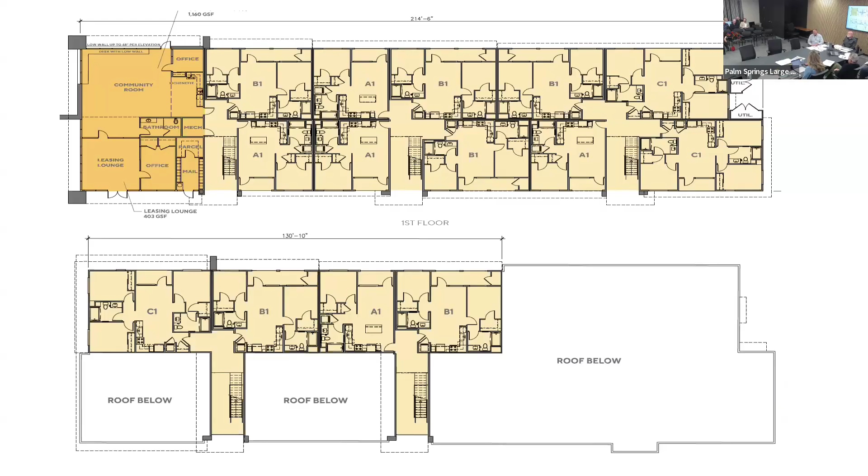Mr. Malacca, do you know why the retention basins have walls around them? They need to retain and then release their water. This is what their civil engineer is describing for the size—can you go to that diagram, please? So they have a set volume they need to hold. Yes, and that's how they get there, pushing it down. Yes, and they have their whole team here, right? You can talk about that. So it's not something planning directed them to do—it's in order to capture the volume needed in the area they're capturing it in, it requires an engineering solution to get the additional depth.

At the planning commission, we talked about what retention basins can look like. Some are usable space, like at Vista Chino, the affordable housing behind DAP—that's a very large retention basin with pathways down into it, dogs play there, and we've added trees and so forth. I don't know if that's possible here. They're not very large, but they are deep.

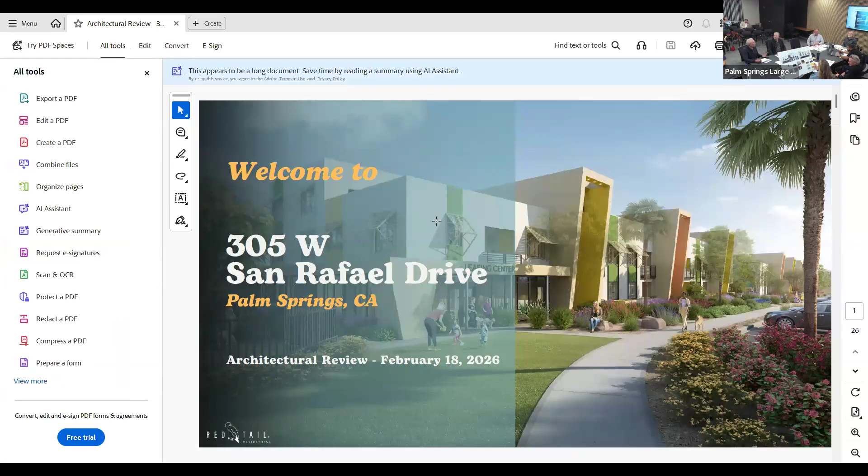I'm Bob Garrison, representing Red Tail Multifamily Development. I have Travis Mahoney with Architects Orange and Opus Garza with Chris Herman Design Group. Good evening everybody, Architectural Review, I appreciate it. Been working with Glenn for quite a while now. This is the clicker, point it at the laptop. We've been working with Ken Lyon on the architectural revisions—you saw a different looking design before, and we've been with Ken for 3 months now. We started in October, so there you go.

I'm not going to repeat everything Glenn already said, but we know where this is—this is in the back parking lot area. Is it working? Yeah, it's working. And this is along San Rafael.

I'm not going to go through the architectural discussion, I'll let Travis do that. You've seen the floor plans, floor plans, back elevation. You have your thing and then the landscape. I'm going to hold at that point and let you jump in now, Travis, to talk about the architecture, please.

Okay, the architecture, as you guys have seen, is a massing of 2- and 3-story buildings that serve 82 affordable apartment units. This diagram shows best what is the 3-story—there's really very little 3-story component to this building. This was done primarily because we have industrial buildings across the way that this building responds to, and to the south we have smaller single-family residences. So the building is responding to the environment and being sensitive to its surroundings.

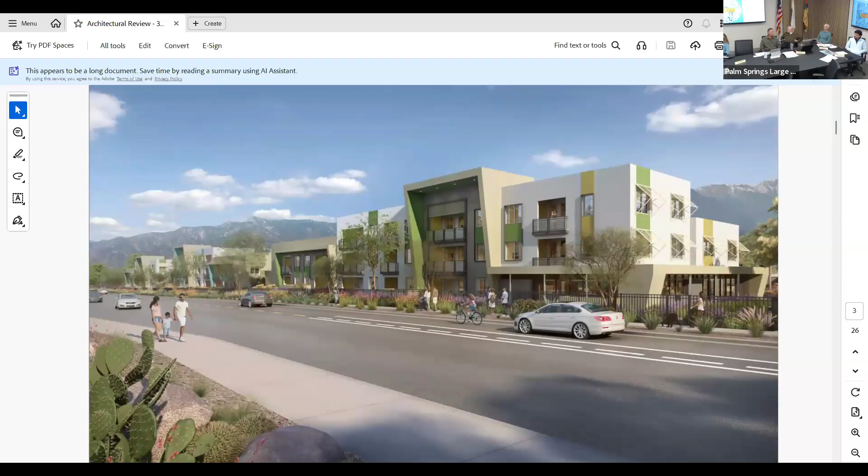It used to have a grill that was like a screen at the top at the third floor level, so people going up to the third floor couldn't just look out. Now that's been removed with the new design, and they can just look out over our backyards. When we were at the city council, council members all understood the importance of privacy for us.

It's extremely important. I visit there with my family at least twice a month with my grandkids, and they play in the backyard. With no privacy fencing, which the city council said was really necessary, but it was the purview of the ARC, not their purview to decide on landscaping, they recognized that we really did need privacy hedging, and we had said about 13 to 15 feet planted.

What we have is desert cassia. This is desert cassia. She brought the plant in. Yes, you brought the plant. I brought the plant. I wanted you to see that that's what's going to be planted as privacy hedging.

I don't think anyone would think that that is privacy hedging. It grows to about 7 feet max, so it will never provide any prevention from people on second floor balconies in the rear, or the third floor walk up, looking directly down on our backyards. It's not just mine, it's my neighbors'.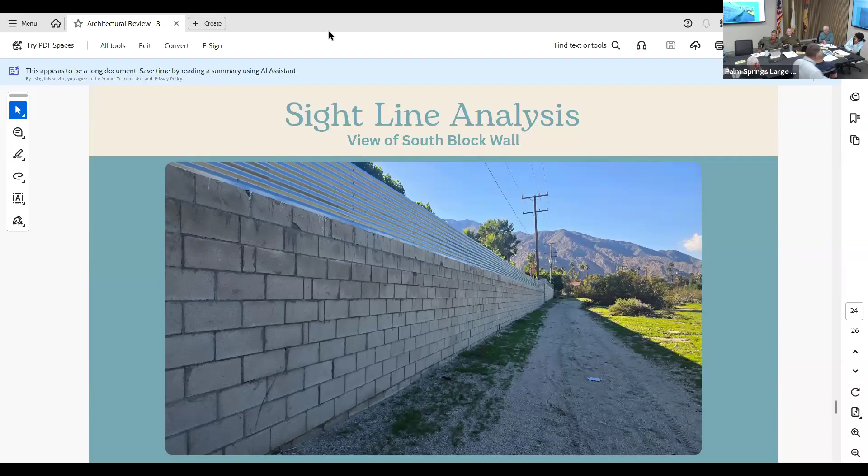I'll just let me keep going. When I looked at the plans, it caught my eye. I always, the floor plan will ground you, just in terms of looking at why people do what they do. And there is, the spaces to get into the units are not great. They're dark, and the light is coming from behind, and you've got people above going into the 2nd floor and people going into the 3rd floor. And I wonder if there isn't a way that you can look at the stairwells as the problem, as opposed to trying to put blockage behind there.

You got a couple issues. I think that those entries into the units desperately need a little bit of attention. If there was a way that you could bring light all the way down to them and provide some blockage on the stair, you could kind of kill 2 birds with 1 stone, something like that. Can I ask you a question? Please, I really need you to think about this strategy. So let me give you a little backstory.

Originally, in the previous design, we had a slat wall, we have a photo of it. It's like a slat wall. If you look, I can do it. Right there, there's these little vertical bars. And in our previous meetings, it was determined that they looked like prison bars. So we were told to remove them. Right, so that's what we did.

And so now, if you look at the 3rd floor stair, that landing stops right there. Okay, so if someone's going to stand there and look out, that's as far as they're going to be, other than being on a stair itself. There's also a skylight right here too, because that was a comment that was brought up in the previous meeting too - are those going to be dark? So we did think about that and we introduced a skylight.

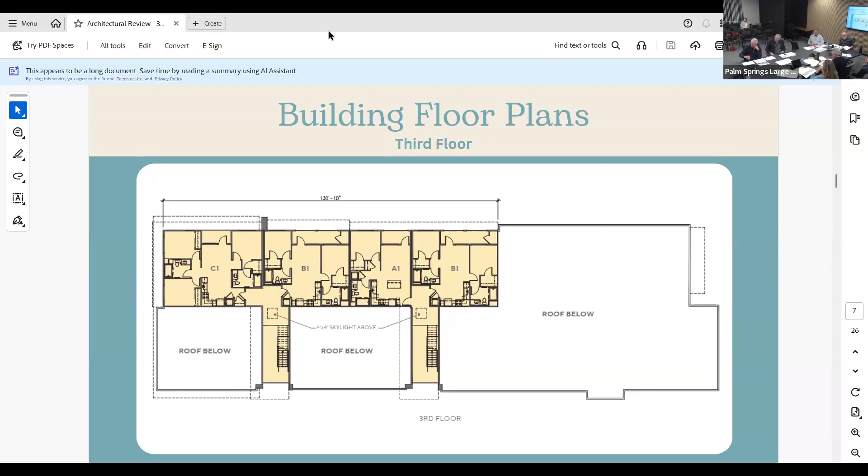Let's clarify that though - if we do louvers, let's go back to the elevation. The louvers would be where we had them before, what were called prison bars, basically from the top of this stairwell down about 5 feet. So visually, if you're standing on the third level at about 6 feet high, that's about where the bottom of that screen would be. It gives some screening, but is that adequate for what you guys are looking for? A quick section will show you - I wouldn't worry about dropping it down.

Agreed, it's very much an element you'd see in some hotel in Hawaii - boom, 3 stories up, louvers. Yeah, if it's at the third level, I think we can work with that. But if the issue is second level windows, we have second level windows on this project. I don't think it's an issue with second level windows.

Let's approach the idea of potentially moving your trash cans away from that southern edge. Is there another location for them? Let me respond first - they are 10 foot from the property line.

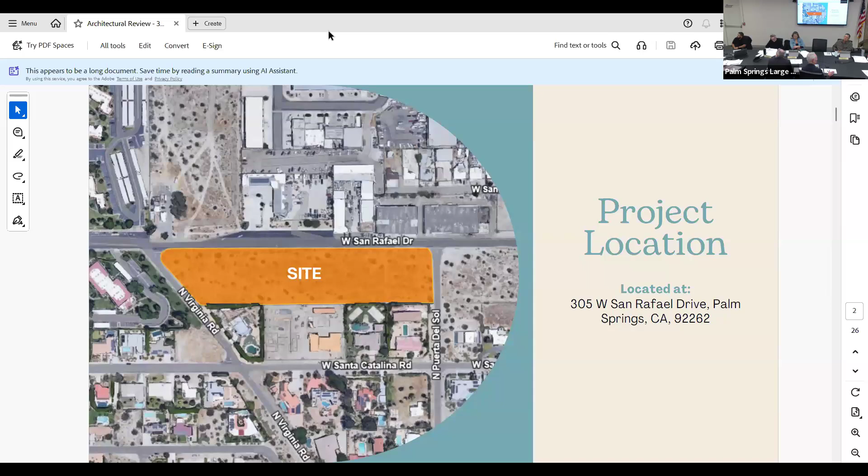The analysis was done, we were asked to look at putting it down by the entry off of Virginia, which would have clogged up the ability for fire trucks to get through. It would also take people on the east side, the north side, and have them walk all the way down. We're required to have them certain distances apart. We placed them according to the way that we were asked to be by both the trash enclosure group and by our number of multifamily developments. So we placed them where they are most accessible to all people, including ADA.

What about the other side of the parking lot, closer to the building? We want them over there, as does the trash enclosure - we want them on that side. Again, they're 10 foot from the wall, from the property line. But if the concern is putting them where they're accessible to all building residents, they'd be closer on the other side of the parking. You don't typically want a trash enclosure as your front door experience on these buildings.

It's like the worst place you could put it. I'm sure you don't want that out your front door. But I also don't think you want a garbage truck coming through your drive at 6 o'clock in the morning, going over speed bumps repeatedly to get to both trash enclosures and waking every resident up on the south side of the building in the process.

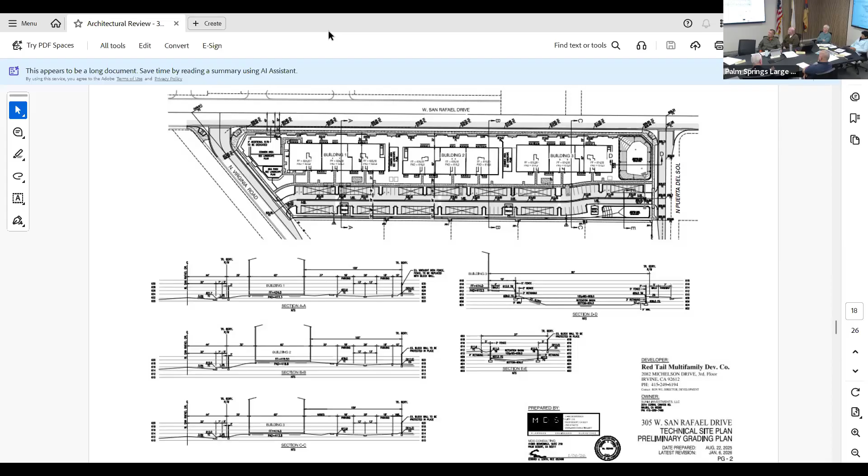3 or 4 feet. So the landscaped area between the buildings is not accessible? We can't get ADA accessible. I can't put sidewalks in there and get them ADA compliant. So they're not accessible? So you have lawns for residents that aren't accessible to any resident who has accessibility issues? It's mainly aesthetic at that point.

Would it make any sense, where you've got these two lawns shown, and I think on one of them you've got a pair of transformers, but immediately south of those lawn areas, would that be a possible alternative location? Can you show us what you're speaking to? The trash bin's right there. Here, here, and here. The carport's right in front of it. I believe there's a transformer where your left hand is.

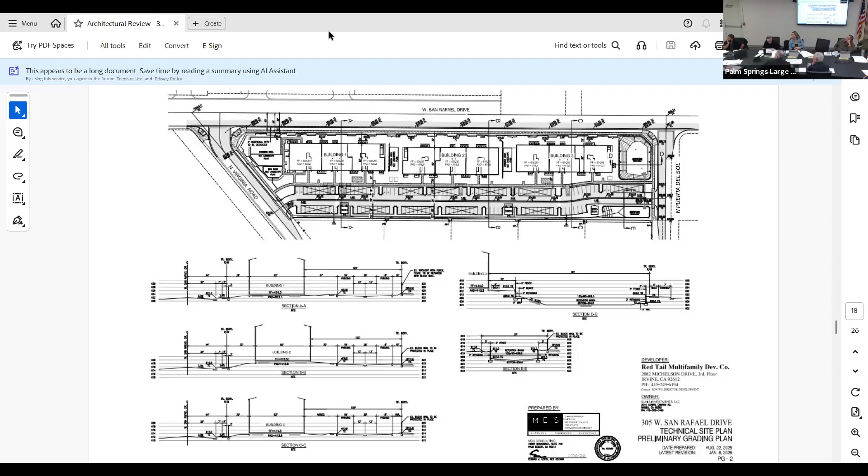Yep, those are the transformers. Could they go somewhere else? Could they go behind it, perhaps, or out on the street? I'm just wondering, because this is kind of an opening spot. If this sidewalk works from a slope perspective, might it work to put the trash enclosures right there by the buildings? Yeah, well it's between these buildings, right? You've got this opening here.

It's typically not advised to put your trash in front of your buildings, even if it's in the space of an opening. Landscape-wise, that's the worst place to put them, from an experiential position.

Is it possible to make these trash enclosures fully enclosed with full-height walls? I don't know what's required in terms of fire code, but essentially they are, if you look at it. We just have a floating roof. But I'm saying if the walls go all the way up to the roof, we don't have the issue of odors coming out. It's a room, you'd have to condition it. Yeah, there's different sprinkler system requirements.

Does anybody know how often Waste Management will be coming by? We have planned twice per week based on 8, 4-cubic-yard bins. Typically, one 4-cubic-yard bin serves about 10 units, plus or minus, not tenants. So based on that math, for 8 bins, it's twice a week.

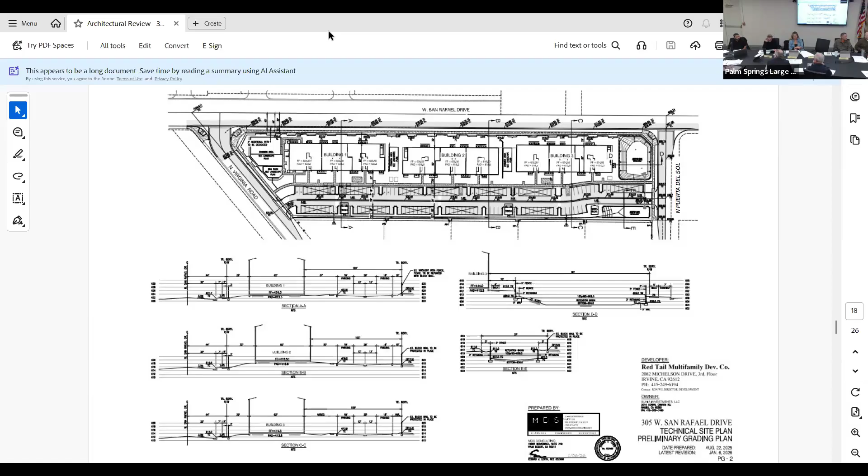Just my suggestion. Can we look at the elevations? Can somebody on the design team tell us what separates the white stucco from the colored bands of stucco? You should go up there with your clicker.

We were looking at a way to logically break the building up, so it wasn't just all pure white. That's kind of where we started from. Working with Ken, we suggested introducing an off-white color, and that's where we looked to break up the building. Where it made the most sense was at the second to third level break, being the major area where we introduced that kind of khaki color, let's call it. That defines the third story massing. It really became about the interplay of the massing elements, the 2 and 3 story massing elements.

For the most part you'll see it's white, on the north side. We introduced this color, but it also creates a language where that color appears at the ends of the building, where it terminates into these tapered, covered areas that express themselves and wrap around to the amenity space on the south side. So it creates a language - there's a color that ties with the color of the stairwells, which are also those shading towers. We've created a subconscious level of language where shading elements are all this kind of khaki color.

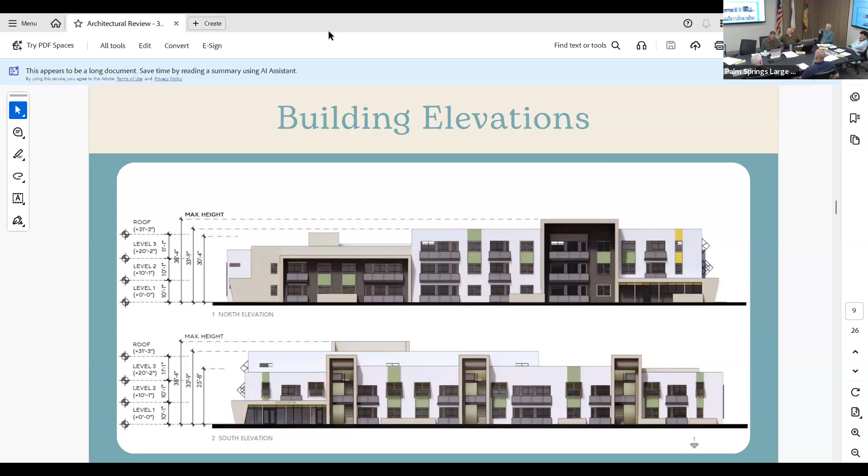But then the accent colors - that's a color, right? And it's going to fade. So then the question is, how often does it get repainted? It'll look pretty sad in about 3-4 years. It'll just start to get blotchy, and then it'll really start to recede.

Can those be integral color as well, the accent colors? Well, you'd have to go with an earth tone - I've not seen bright greens or yellows. I think we have examples of this. All you have to do is look at the Saguaro Hotel, and they repaint those colors every once in a while. I think it's a factor of the reality of maintenance. I don't think we can split hairs over this kind of thing. You need to work around the issues that you still have architecturally and move this forward for them.

Does anybody have concerns about the perforated metal guardrail screens? The balcony screens. Do you have an image of that? I have it, it should be on the color material board. I've seen it - there it is, right here. It's so hard to tell. It's kind of a blow-up detail of it right here.

So it's your ironwork on the outside, and the inset is the perf metal. In small horizontal segments, it reads almost like gray wood stacked on top of each other. Well, the dark lines you're seeing are actually the ironwork on the outside face. This is just set on the inside, so it creates a backdrop. What would normally be just air is now perforated metal, so it screens that area without completely redesigning the balconies we had.

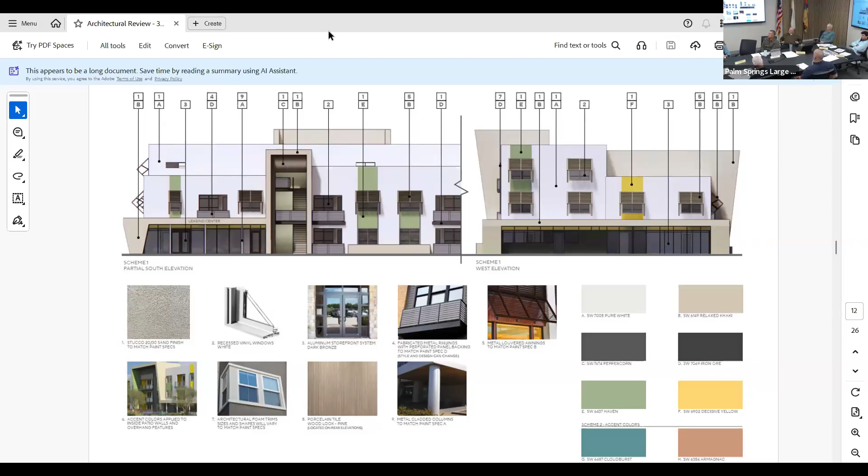Does anybody have any concerns about the 30%? Should it be 15%? Should it be 20%? Okay, seeing none. Alright, any other questions of the applicant?

I have some. Do you feel like these renderings accurately depict your landscape design? They're fairly close, but it's very difficult to get landscape in the rendering for the desert material. These just feel to me like really thick, lush renderings, and when I look at the landscape plans, I don't really see that.

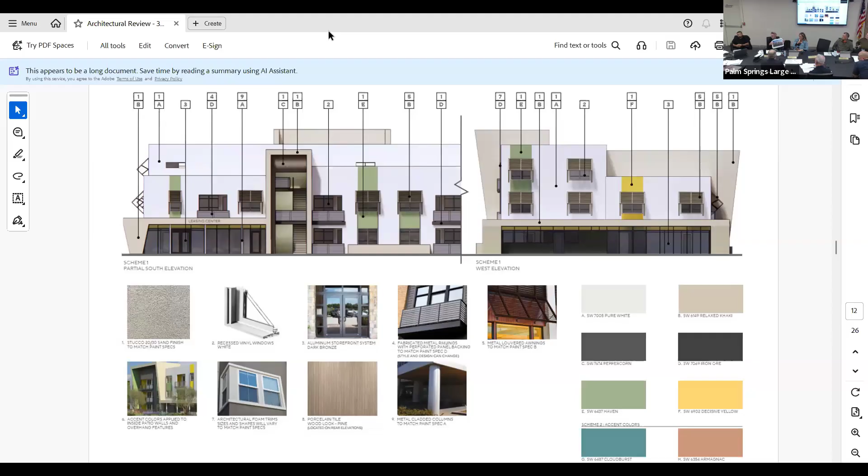So this one in particular, running along San Rafael - that is layered and thick. And when we look at the site plan, there's a lot of DG that I see on the site plan. A big part of what makes that image look as good as it looks is the landscape and the layering there. If it's gonna look that good, it's great, but if it's not to that level of density, then this isn't great. I'm sure you guys did these renderings, right?

Mhm. Did you follow his landscape plans? We did. Is there more DG on the foreground? It can be, conducive of looking at it from an angle and looking at it from the top. I've got ground cover on the bottom, shrubs on the top, but I'm also trying to create some negative space for maintenance walking around. So that lush look, from the side, it's obviously going to be a little bit more sparse in terms of the grasses. But I feel pretty good about the look of the vines going up against the buildings and the ground covers in front of them.

Would you have any issues adding something along the south property line? That area only shows trees. Along the south property line here - that whole side just shows trees, I have no shrubs even shown. Oh, well I'm talking about trees.

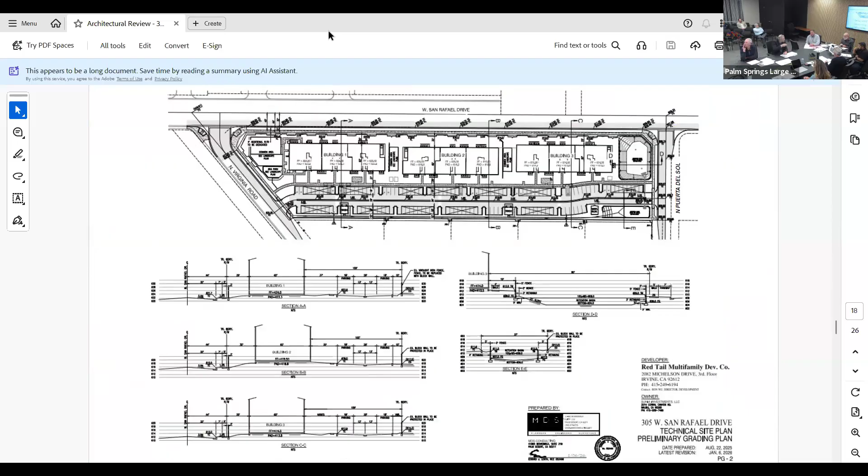Okay, just quickly, design team, development team: there are a bunch of condensing units sitting on the ground right outside of your bedrooms, both front and back. Do you have any issues with putting those on the roof? Yes, that has been an issue with our client until now; they do not put them on the roof. We've got a number of them across the state. It's been an issue - roof maintenance, et cetera.

Yeah, have you guys talked to your mechanical engineer yet? Can you use the suitcase-size outdoor condensing units versus what you're showing here, which are the typical 3-foot by 3-foot? I don't know that answer from a mechanical standpoint personally. It would help, because what you'd wind up with is a bunch of very slim units that can be stuck on a wall.

What was the resistance to putting it on the roof? Maintenance, they've got to get up there. Did you look at putting them on the second floor roof and feeding? Same issue, can't get there. I tried. Okay, yeah, okay.

All right, thank you guys. Please have a seat. We will have hopefully a quick deliberation here and get on to a motion. All right, who would like to start discussion?

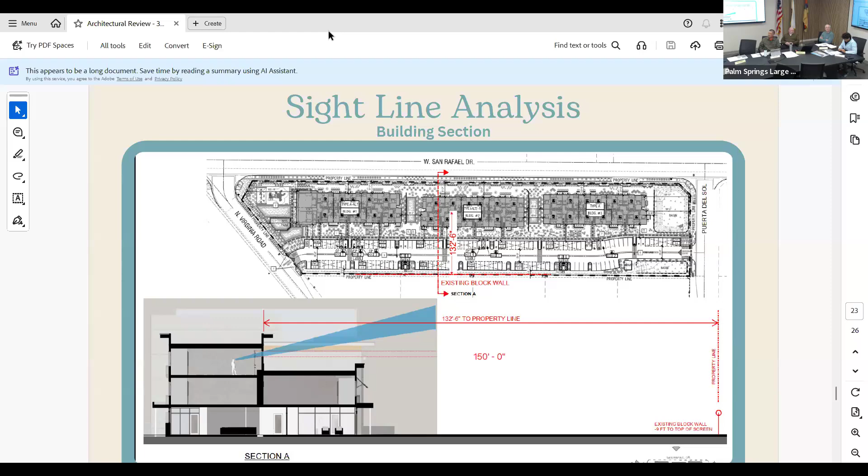I know we're all kind of worn down, it's 9 o'clock, and I feel like we're being pressured - yes, there was definitely a directive to move this thing along or deny it, but don't turn it into a restudy.

So we've got options. I'm open to looking at some privacy screen, some type of screen at that upper level. I think we're trying to get a hedge at that height to try to minimize view impact, but we're going in circles - I don't think that's possible. So if there's a way to minimize the view into it - again, I do think it's a long distance, but I understand.

And if it were some type of louvered screening, yeah, I think that would help with the privacy concerns.

Member Elliott, what would the - other than cost - what would be the negative effect of doing a ficus hedge along that southern boundary? I mean, there's no - that would be my knee-jerk reaction, is just put, like, you can get ficus that high, just need the room for them, 36, 48-inch box, they're out there. But maintenance for that's not average maintenance. That's somebody - it's twice a year out there. Yeah, I mean, that's a big deal.

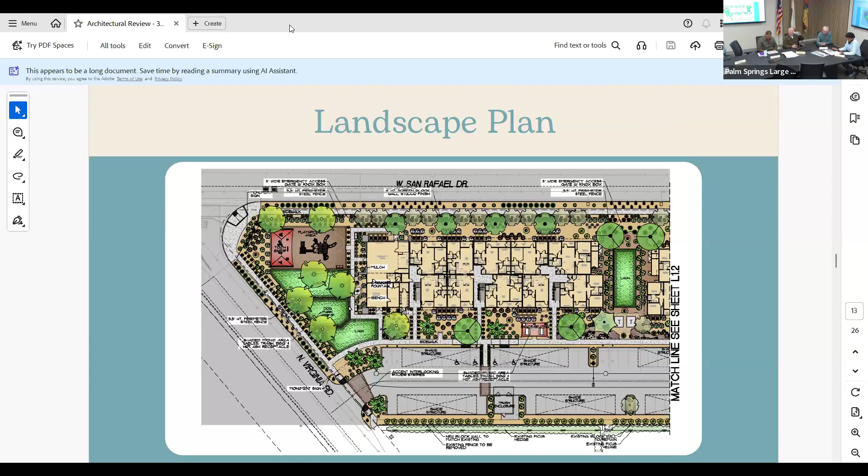Ken, I just want to get into this document, that the applicant will have 10 minutes to speak, or just as long as we have it limited, and consistent, because I think we let the first setup go on and on and on. If we have consistency, we will truncate these meetings a bit. I think we can figure out a way to do that.

Okay, anybody else on Architectural Review Committee reports, requests, comments?

Guys, we're not done with the meeting. Can you step outside so we can go?

Okay, Planning Director's report. I don't think we have anything to report for tonight. All right, so we are going to call for adjournment at 9:09, Wednesday, February 18th. Thank you all for hanging in there on this. What time is it? 9:09.